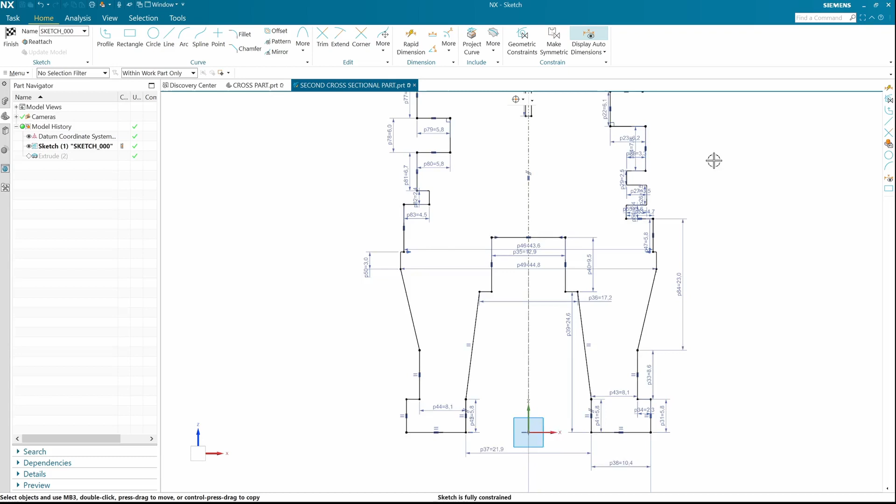Every part starts off with a sketch to build from.

Part A consists of the hairdryer's fan and motor, whereas Part B consisted of its metal parts that copper wire resistance would have been wrapped around, as well as its shell, which was crafted as two separate objects fitting together like a puzzle.

The metal parts, labeled as cross part and second cross-sectional part, were created by drawing a sketch first. All vertical and horizontal measurements were taken and manually entered through the rapid dimension function.

To ease the process, the profile function was first used to map out the basic shape of the parts, and it was then fine-tuned with the right dimensions to create an exact replica of the part in a 3D space on NX.

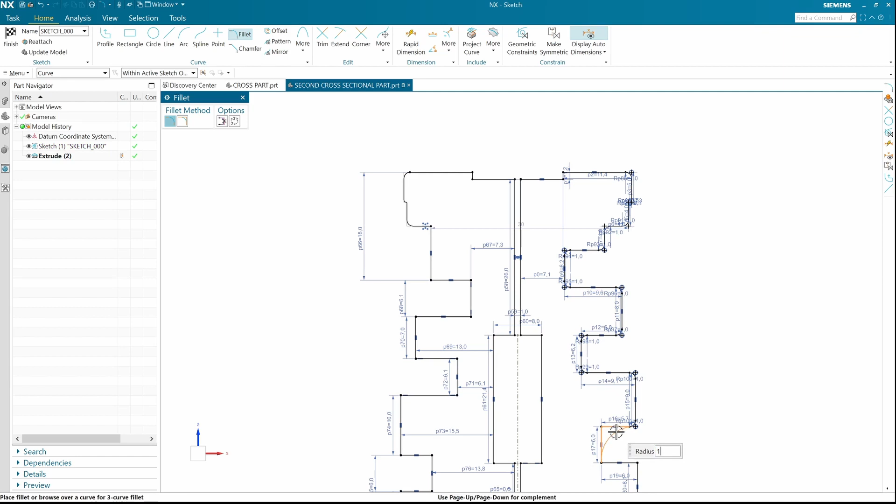All corners were rounded as measured, most having a 1 mm radius, but variations like 0.3 mm and 0.5 mm can also be seen.

The sketch was then extruded to a depth of 0.8 mm and assigned the material iron 40.

After both these parts were created, they were assembled together into a sub-assembly. Assembly constraints like touch-align were used.

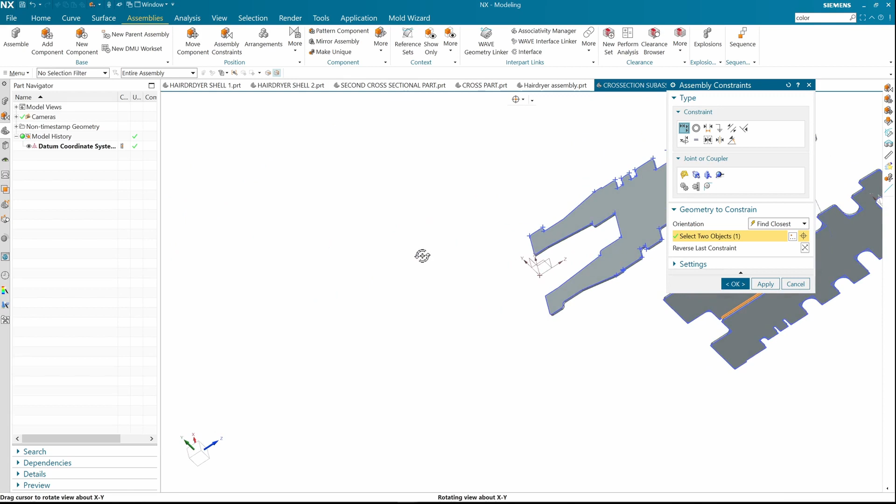Next is the shell of the hairdryer. These parts were made through using the surface modeling and modeling sections on NX, once again starting with a sketch and working from there to design an accurate replica of the hairdryer shell.

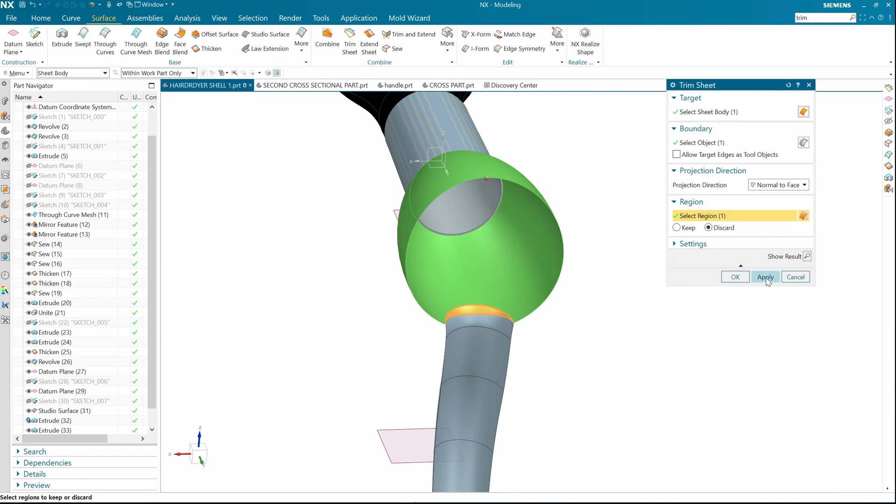Features like revolve, extrude, subtract, studio surface, and edge blend were used to create these shells. Just like before, the replica is accurate to real life due to us using measurements from real life and entering them through rapid dimension into NX's 3D realm.

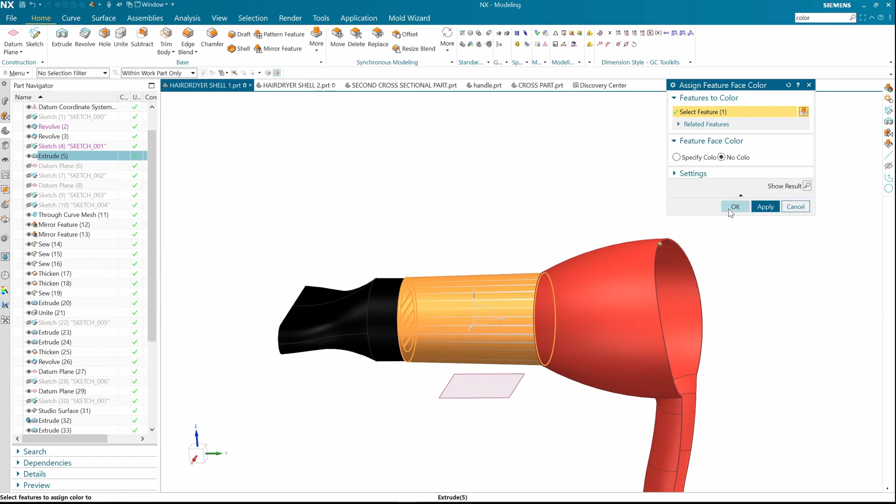The shells were assigned the material polypropylene. Lastly, color was added to the parts to add more realism through the assign color to feature function.

The detailed drawings were created by adding a new sheet in the drafting interface of NX. Using the NWU template, all needed information was entered, like scaling, date, the part names, and personal information for identification purposes.

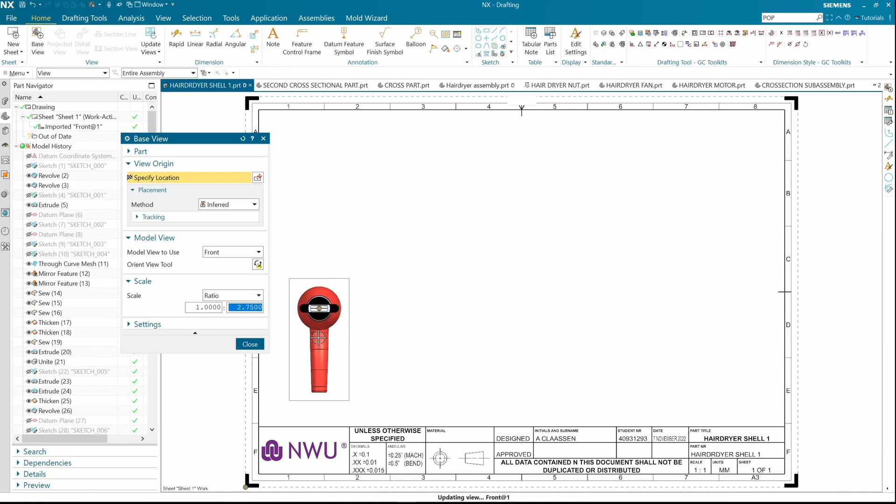A base view was added, and then a top and right view projected above and next to the front view, as we selected it.

An isometric view is added in the top right corner, and settings were changed so that the isometric view is fully shaded and not just a wireframe.

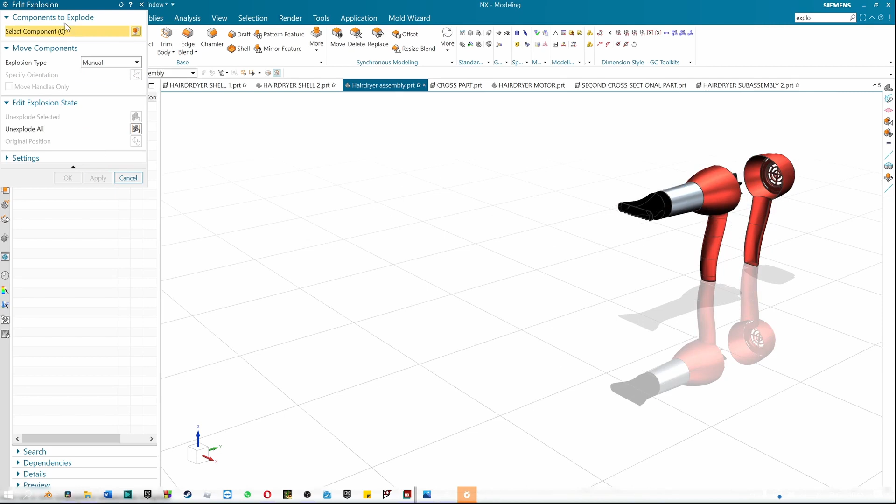Just like every part starts with a sketch to build from, every model ends with fine-tuning and double-checking that all measurements are correct. Thank you.